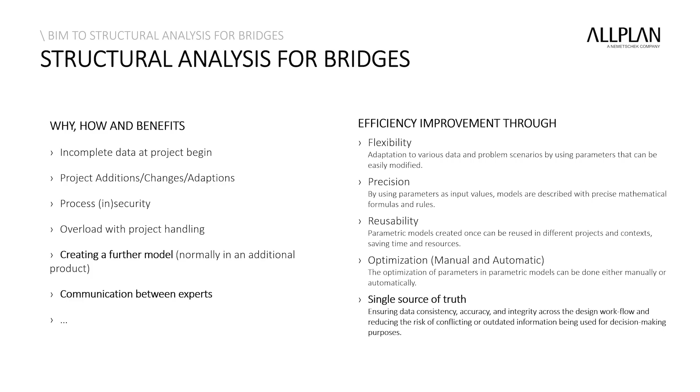This approach not only enhances our project's efficiency, but also builds a foundation of trust and reliability in our work. Just as ALLPLAN Bridge serves as a collaborative platform for two fundamental roles in a project, the structural engineer and the modeler, by sharing a unified geometrical and analytical model.

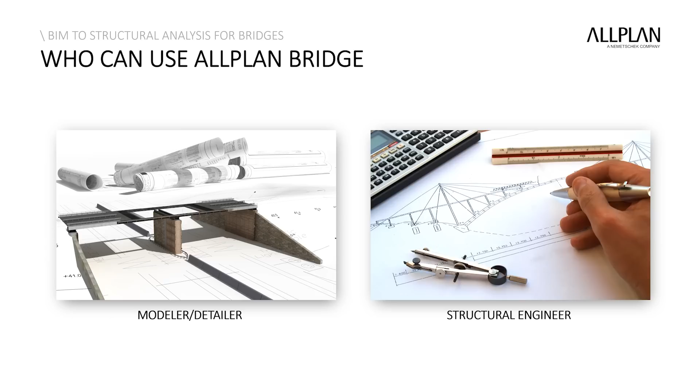The concept of a single source of truth harmonizes our approach to managing project data and workflows. In this shared environment, while the structural engineer conducts analysis and design checks, the modeler, or the detailer, on the other hand, refines the geometrical model for analysis and crafts all necessary geometrical features. This seamless integration ensures that both parties are not just working with the same data, but that this data remains consistent, accurate, and up-to-date throughout the project lifecycle.

Now let's take a look at the modeling approaches our platform supports and the current state of analysis for each. First up is axis-based modeling. This method involves creating geometry by extruding along an axis, with the flexibility to vary designs as needed. We fully support analysis for this approach, ensuring that designs are not only flexible, but also structurally sound.

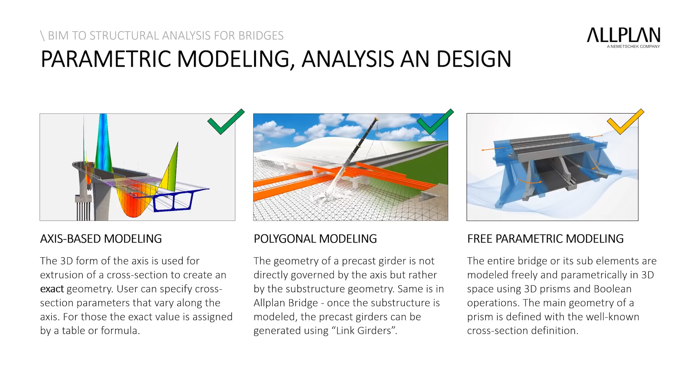Next, we have polygonal modeling. This approach is particularly useful when the design of the superstructure is influenced by the substructure, or when modeling precast elements. It allows for an integrated design and analysis process, ensuring that all aspects of the structure are considered and analyzed together. Lastly, we introduce free parametric modeling, which uses 3D bodies for creating complex structures like culverts or abutments. While this approach offers significant design flexibility, it's important to note that we are still developing the analysis capabilities for these models, and this is a key area of focus for us.

In our exploration of modeling approaches, it's crucial we also highlight the advanced solutions we offer for modeling tendons, a key component in many of our projects. Tendons, with their unique requirements, benefit from a range of sophisticated modeling techniques available in our system.

Tendons can be precisely modeled using points as constraints, allowing for exact placement and alignment within the structural model. For more dynamic and flexible modeling, tendons can be variated through tables, utilizing parametric points. This method offers the adaptability needed to model tendons in complex geometries accurately.

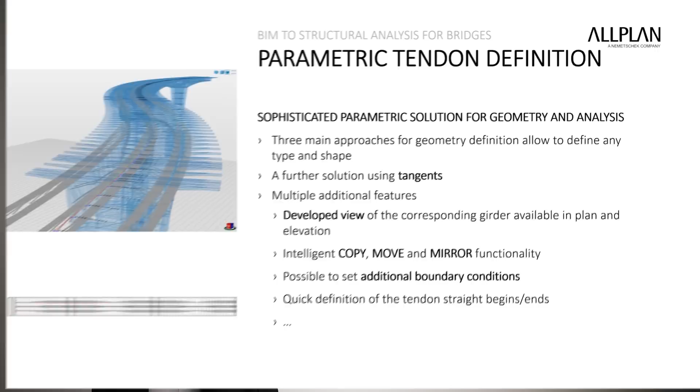Moreover, the definition of tendons isn't limited to just points and variations. We also incorporate the use of tangents and radii, providing an additional layer of precision and control in the modeling process. Beyond these core methods, our system is equipped with additional features designed to enhance the tendon modeling process.

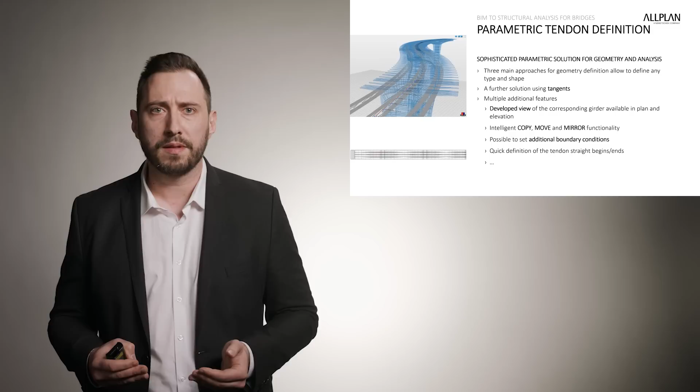Developed views offer a comprehensive perspective of the tendon's placement and path. Intelligent tools for copying, moving, and mirroring simplify the process of adjusting tendon layouts across the model. The quick assignment feature for straight ends and beginnings, along with the ability to define additional boundary conditions, further streamlines the modeling process. Each of these features is designed with the user in mind, ensuring that the complex task of tendon modeling is as efficient and accurate as possible.

By leveraging these sophisticated modeling solutions, users can achieve a higher level of detail and precision in their projects, ultimately leading to better performing and more reliable structures.

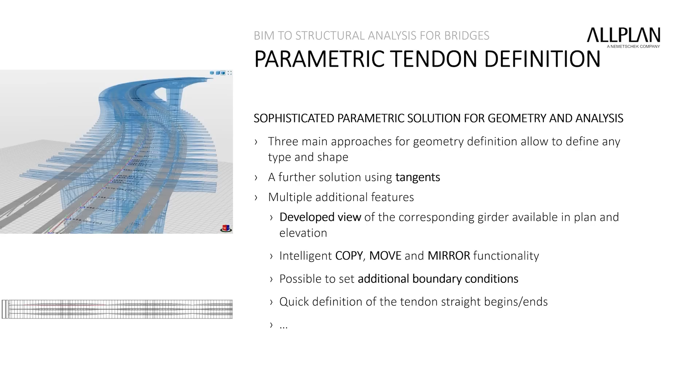This foundational step ensures that every component of the project aligns with the specified IFC classification, fostering consistency and interoperability from the outset. Moving deeper into the project structure, the IFC type becomes more specific at the cross-section level.

For example, an element might be classified as an IFC beam, to which we assign a custom name, such as main girder, to precisely describe its role within the project. This level of detail enhances the clarity and specificity of the project's BIM data, facilitating more accurate analysis and collaboration.

The next layer of detail involves defining the IFC category for specific bridge parts, like the IFC bridge part superstructure. This categorization further refines the project's data structure, enabling detailed tracking and management of each component.

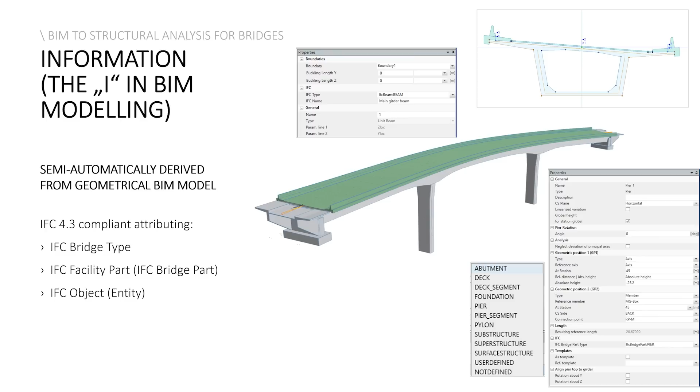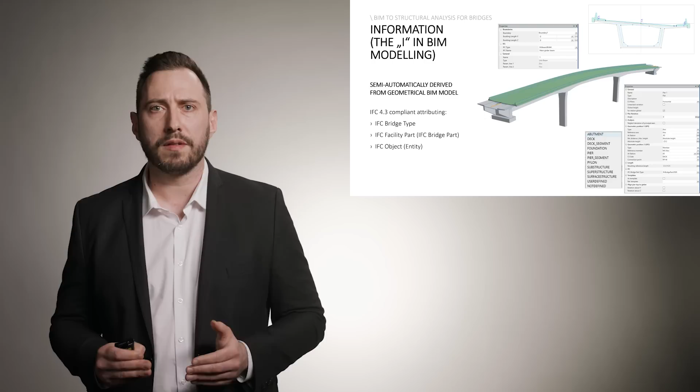This structured data is then seamlessly integrated into ALLPLAN engineering, where it serves as the foundation for further detailing. Here, additional predefined or custom attributes can be added, enriching the project's BIM data with even more depth and flexibility. This process not only ensures compliance with IFC 4.3 standards, but also enhances the project's interoperability and the effectiveness of collaboration across different platforms and teams.

Let's take a look now at how we bridge the gap between our geometrical models and their analytical counterparts. The journey from geometry to analysis is streamlined, leveraging the detailed work already accomplished by the modeler. At the core of this transition is the utilization of the geometrical model's defined data.

The structural engineer enriches this foundation by adding essential elements such as material properties and structural connection. The beauty of this approach is that the bulk of the necessary data resides within the geometrical model itself. Our system then takes control, analyzing the geometry to automatically generate the required data for crafting an analytical model.

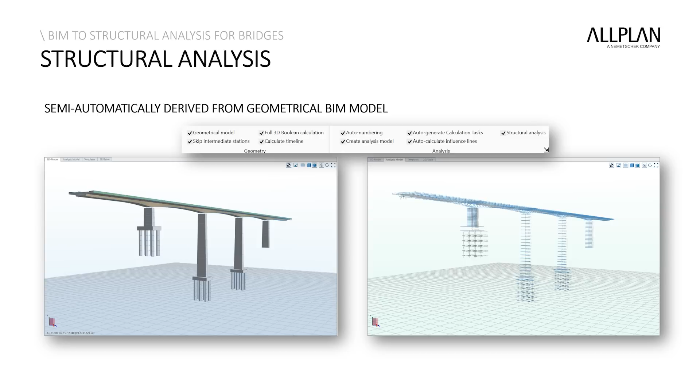This includes the intelligent numbering of elements, which can be executed automatically or tailored by the user to fit specific needs. Following this, our software skillfully creates the analytical model, establishing a parametric link with the geometrical model. This parametric linkage ensures that any modification made to the geometry are also automatically reflected in the analysis.

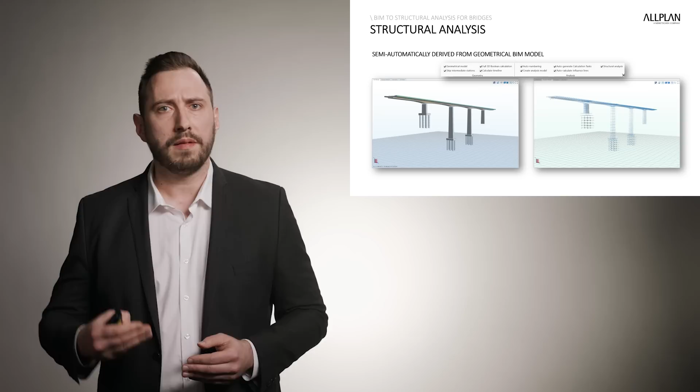This dynamic adaptability underscores our commitment to the concept of a single source of truth. Changes in design no longer mean starting from scratch. Instead, the analysis evolves in tandem with the geometry, ensuring accuracy, saving time, and enhancing reliability across the project lifecycle.

Furthermore, the user plays a crucial role in defining various parameters that are essential for a detailed and accurate analysis. This includes setting up the auto-numbering, specifying beam units, and determining composite units that contribute to the structural integrity.

Additionally, users can define load-only units, which are considered for their load effects, but not for their stiffness contributions, enhancing the precision of the analysis.

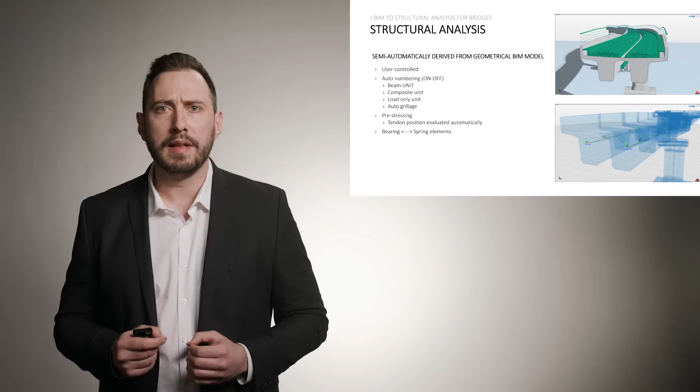The software also accommodates the challenges of auto-grillage setup, ensuring that the structural model accurately reflects the intended load distribution and support conditions. The pre-stressing of tendons, a critical component for certain designs, is carefully evaluated based on the geometrical model and predefined stressing actions, ensuring that the effects are accurately incorporated into the analysis.

Positions of bearings, necessary for the distribution of forces and the overall behavior of the structure under load, are also defined by the user. This level of detail and user control ensures that the analysis not only adheres to the specific requirements of the project, but also leverages the geometrical model for a comprehensive understanding of the structure's behavior.

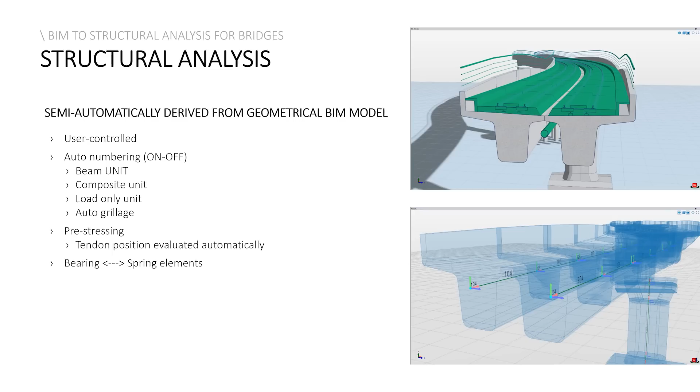Structural analysis within our system is designed to be a semi-automatic process, offering a blend of automated capabilities and user-driven customization, as we briefly touched upon in the previous slide. The initial model is directly derived from the geometrical definition, ensuring a seamless transition into the analysis phase.

The subsequent step involves defining the construction sequence, which outlines how the bridge will be constructed. This critical phase is entirely under the user's control, allowing for the specification of one or more construction stages. Each stage encompasses various phases of construction, such as pier construction, main girder erection, and the application of loads and design checks. This user-defined approach ensures that the analysis accurately reflects the intended construction methodology.

Following the activation of the structure, the user then proceeds to define the loads. This encompasses everything from static loads, such as self-weight and superimposed dead loads, including settlement, wind, traffic, and earthquake loads. With all load scenarios established, the user then moves on to define superpositions and combinations, setting the stage for the execution of final design checks.

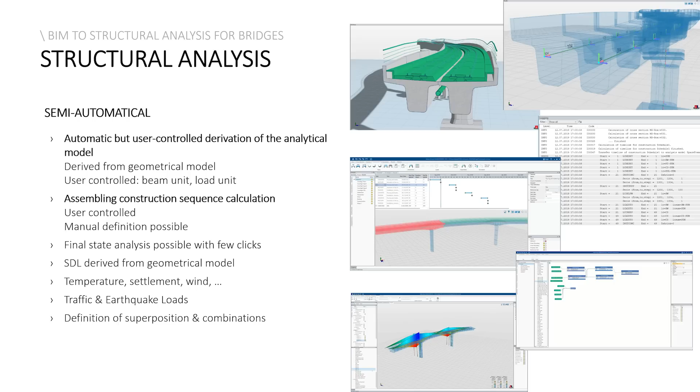This step culminates the structural analysis process, ensuring that the structure not only meets design requirements, but is also prepared for real-world conditions. After the construction schedule is established and all loads and phases are defined, our software steps in,

adopting an open and interactive approach. It diligently analyzes the input data, proceeding to generate the necessary calculation tasks. These tasks are clearly displayed in the logging view, ensuring transparency and real-time feedback throughout the process.

Tasks within the system can be generated in two ways: automatically, based on predefined settings, or manually, offering users the flexibility to tailor the analysis to specific project needs. This dual approach marries automation with user control, providing a balanced, open-ended system that adapts to the unique demands of each project.

By offering this level of openness, combined with user-driven control, the software not only streamlines the analytical process, but also empowers users to steer the project analysis according to their precise requirements. This ensures that the final analysis is both comprehensive and customized to the project's specific conditions and objectives.

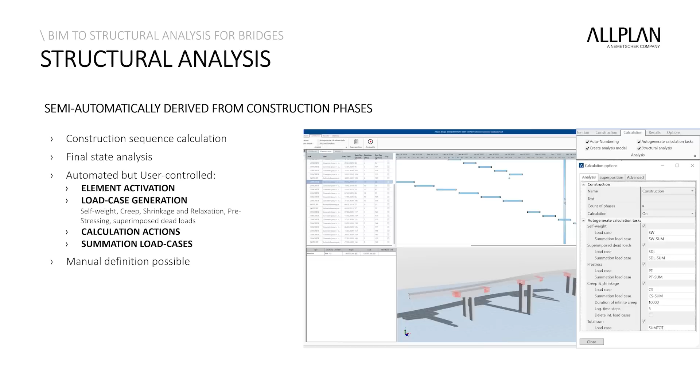The final stage of our structural analysis takes place within our design code engine, where we conduct comprehensive checks on concrete structures against two major standards. On one hand, this is Eurocode, and on the other hand, it's AASHTO. For Eurocode, we've gone a step further by incorporating several national annexes, including those from Germany, France, Spain, and Austria, among others, to cater to a broader range of project requirements and local compliance needs.

Our analysis covers a wide spectrum of checks. We assess linear stress and design the necessary reinforcement to address bending, shear, and torsion forces. Additionally, we evaluate the potential for brittle failure, crack formation, and fatigue to ensure the structure's long-term durability and safety. Detailing checks are also a crucial part of our process, ensuring that every aspect of the structure's design is scrutinized for compliance and practicality.

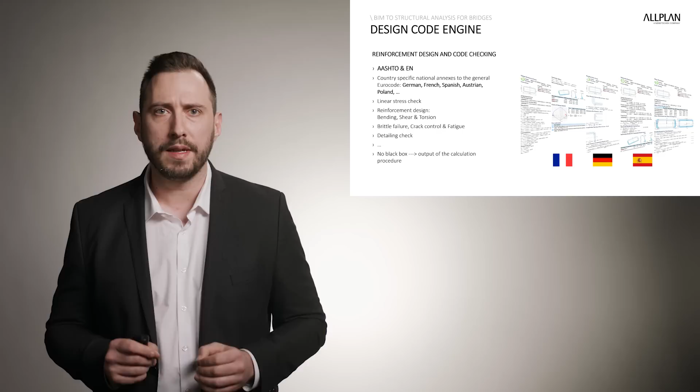Importantly, our DCE is designed to be transparent and user-friendly. We provide an extensive report detailing all the calculations, including equations and the standards applied throughout the analysis. This ensures that the process is not a black box. Users have full visibility into the methodology and can review any aspect of the analysis at any time. This level of transparency is crucial for trust, verification, and ultimately the success of the project, ensuring that all stakeholders can be confident in the integrity and compliance of the structural design.

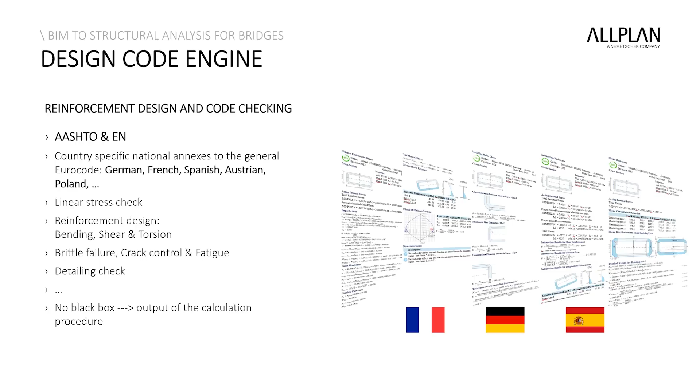After completing all necessary calculations and checks, the next step is to compile an extensive report that effectively presents the project's details and findings. To facilitate this crucial phase, our new reporting tool operates within the familiar environment of Microsoft Word, creating a seamless final step in the process. The integration between ALLPLAN Bridge and the reporting tool is achieved through a sophisticated data export function and a comprehensive intermediate database that houses all the numerical data.

This setup ensures that every piece of information, from tables and images to detailed reports, maintains a parametric link to the source data. And this parametric linkage is key. It ensures that users are promptly notified of any changes in the data, providing them with the opportunity to update the report accordingly. This dynamic connection between the project data and the reporting tool not only streamlines the reporting process, but also guarantees that the final report is as accurate and up-to-date as possible, reflecting the latest project details and analysis outcomes.

Concluding our ecosystem of advanced features is the automatic reinforcement generation, which exemplifies the seamless parametric link between Bridge and Engineering. After the bridge analysis is complete and the reinforcement data is defined, we leverage the power of Python scripting to generate parametric reinforcement models in ALLPLAN Engineering. This process ensures that the reinforcement geometry perfectly aligns with the structural shape as defined in ALLPLAN Bridge, covering longitudinal, shear, and torsion reinforcement needs.

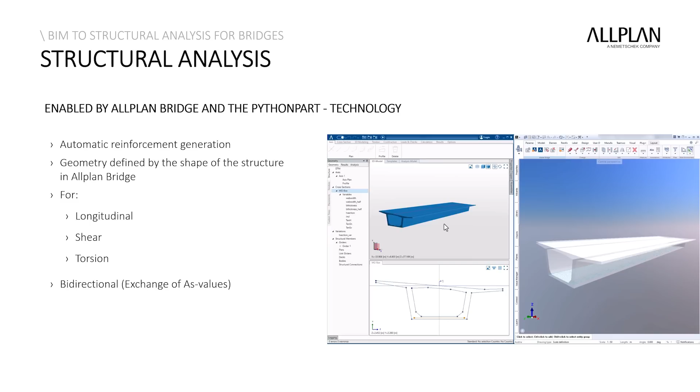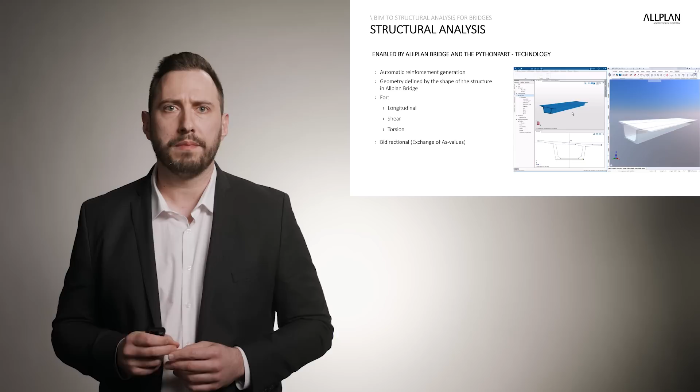Moreover, this system supports a bidirectional link, meaning any modification made to the reinforcement details by the detailer, for example, can be reflected back in the analysis. This dynamic interaction ensures that the analysis remains consistent with the project's evolving details, enhancing the accuracy of the design and the efficiency of the workflow. This bidirectional capability not only streamlines the design process, but also ensures that the final construction documents are accurate, reflecting the most current analysis data and detailing adjustments.

Let's take a moment to reflect on the journey we've embarked upon today. We've explored a range of innovative features and methodologies designed to transform the way we approach infrastructure projects. As we conclude, I would like to highlight significant impacts of these advancements across three critical areas: time savings, quality of deliverables, and long-term value.

Firstly, our focus on automation and efficiency is a game changer. By leveraging automated processes for structural analysis and reinforcement generation, we significantly cut down manual labor. The dynamic updates facilitated by parametric links ensure that changes are reflected instantly across all aspects of the project, from design through to reporting. This not only saves time, but also reduces the potential for errors, making our workflow more efficient.

As we pivot from the tangible benefits of time savings, let's consider how these efficiencies translate into the quality of our project deliverables. The precision and accuracy we achieve through our advanced modeling and analysis techniques set a new standard in project outcomes. Our commitment to comprehensive analysis, adhering to international and national standards, ensures our deliverables meet the highest quality benchmarks. Furthermore, the enhanced collaboration facilitated by our bidirectional link system ensures that all stakeholders are always in sync, elevating the quality of our final deliverables.

And while the immediate benefits are clear, it's essential to look beyond the horizon and understand the long-term value these innovations bring to our projects and practices. Our approach is built for the future. The adaptability of our tools and processes ensures we can meet evolving project requirements and standards, providing long-term relevance and value. The integrity of our data, maintained through a single source of truth, lays the foundation for reliable lifecycle management of infrastructure projects. Moreover, our continuous investment in innovation positions us at the forefront of technology, ensuring that we offer long-term value to all stakeholders involved in the project lifecycle.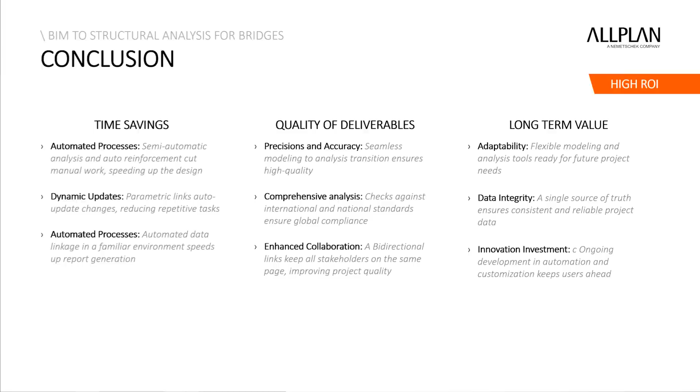In conclusion, the methodologies and technologies we've explored today are key to transforming our approach to infrastructure projects, promising significant time savings, superior quality, and lasting value. As we move forward, embracing these innovations will be crucial in shaping our industry's future.